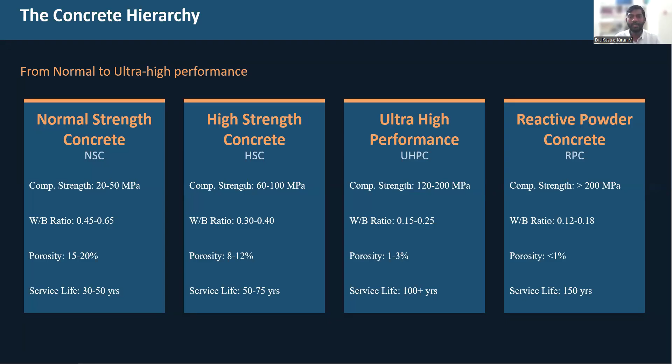And as we proceed with each concrete type based on its strength, obviously we can increase the service life of the structure as well. As you can see, for normal strength concrete, the service life can be expected up to 30 to 50 years roughly. And when we go for high strength concrete, ultra high performance and reactive powder concrete, the service life of the structure can be increased at a larger scale, which is economical and at the same time a good sign for concrete technologists or concrete researchers.

But we have some limitations with conventional concrete. Typically, conventional concrete lacks in tensile strength, giving a very low amount, approximately 2 to 5 megapascals. That's the maximum that we can attain in the low tensile strength of conventional concrete. And that also comes with poor durability because of a larger amount of pores compared to other types of concrete.

So this is also susceptible to harsh durability conditions. Let's say when I expose conventional concrete to acids or sulfates, there is a high chance deterioration might happen within the first 14 to 28 days or within the first 56 days itself. So that's again one of the problems with conventional concrete, and the durability problems lead to higher maintenance costs. So that is also one of the disadvantages.

And coming to the carbon footprint, especially the life cycle assessment or life cycle impact, conventional concrete is also prone to consume too much material, and that leads to a higher release of carbon dioxide, so the carbon footprint will increase. That's again one of the disadvantages.

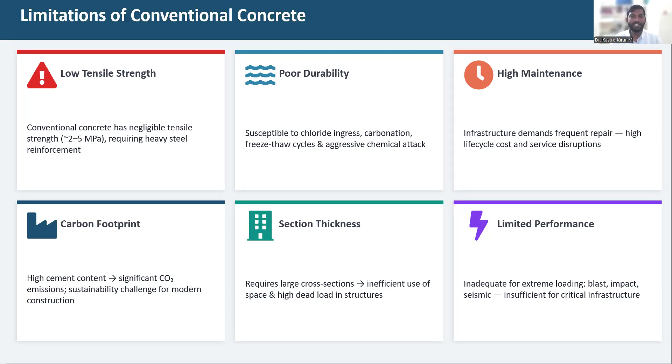And with conventional concrete, the section thickness we attain is of a larger scale. But in real time, when we go for large scale construction, especially girders or bridge decks, we need slender sections or very thin elements, providing equal or better strength with better durability. So considering all these limitations of conventional concrete, we got a better one, which is ultra high performance concrete.

In simple terms, we can define ultra high performance concrete as something which will give strength between 150 to 250 megapascals. Again, this is not a standard value. That's a typical value reported across the literature which I have studied. And ultra high performance concrete will yield up to 15 to 30 megapascals of flexural strength, which is a very good sign for utilizing it in bridge decks, girders or large scale construction.

And we can also minimize the crack width, which will be less than 0.2 mm, which is better compared to any other type of concrete available at the moment in the industry. It also has low permeability because of its dense packing and its material composition, since very fine materials are used in the preparation of ultra high performance concrete. That leads to lower permeability.

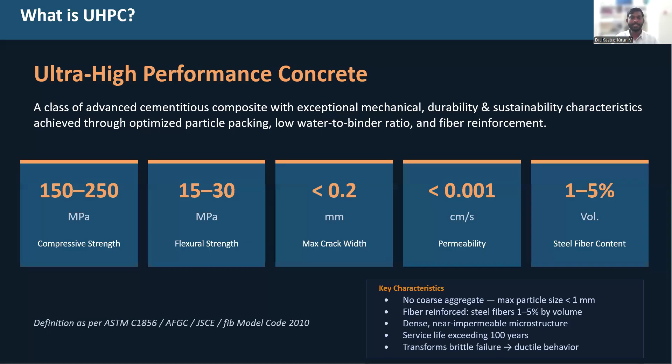Now the question here is, why do we need UHPC? The first thing is infrastructure demands. Let's say I'm constructing lengthy structures or tall structures, or structures which are more susceptible to corrosion or any kind of durability-related vulnerabilities. Because of this infrastructural demand, we need to go with ultra high performance concrete.

And when we need slender sections, let's say thinner elements from a structural perspective, not just a material perspective, then again we need an alternative material, which is UHPC. And UHPC also provides better durability: provided the right combination of materials is used, we can attain exceptional durability characteristics, which can lead to 100 plus years of lifetime of the structure.

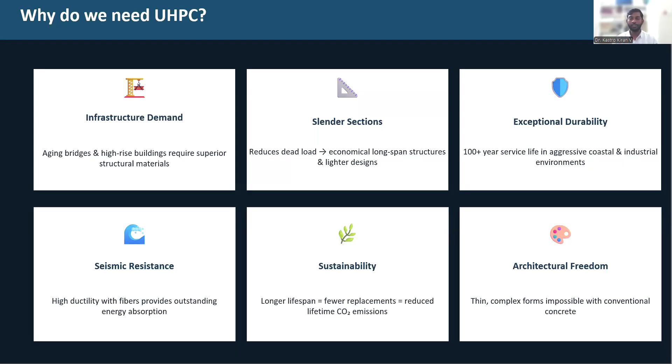And when UHPC is combined with certain kinds of seismic design, that can also increase the seismic performance of the structures as well, which is nowadays preferred in the construction of bridges or bridge decks, especially focusing on seismic performance alongside the priority given to the sustainability aspect as well. So we can use less material, which will produce greater strength or greater durability in real-time scenarios. So that's the need for UHPC.

And coming to the real-world applications of UHPC, mostly UHPC is preferred for bridge decks, bridge joints, or even protective structures, architectural facades, and marine structures. Particularly, I'm working with bridge decks, joints, and marine structures. And for retrofitting also, it will be very easy in the long run. And this is particularly preferred in seismic zones where we can expect earthquakes of magnitude greater than or equal to 4.5 to 5.

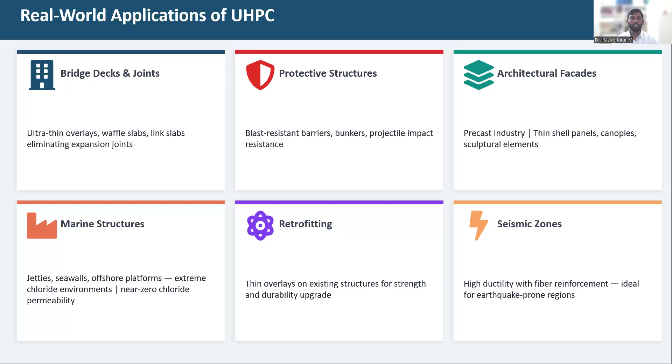So there are proven case studies which show that when we use UHPC for large-scale constructions, especially bridge decks or marine structures, they have resisted seismic loads, which is again a good sign for concrete technologists as well.

And coming to the UHPC design standards on materials, across the globe there are multiple design standards available, and these are some of the popular design standards for UHPC which you can refer to when you are working on UHPC mix design or UHPC testing. So there are different protocols. You can use any one of these protocols or a combination of them to see how things are going to work when you are testing in laboratory conditions, or even when you take it to large-scale field testing.

And we preferably work with the FIB model code, which is a standard one. Again, that comes with fiber reinforcement. It's not just the UHPC thing; it is ultra high performance fiber reinforced concrete provisions. Especially in UHPC, we'll be using fibers, especially steel fibers. So in that case, the FIB model code and ASTM code are preferred.

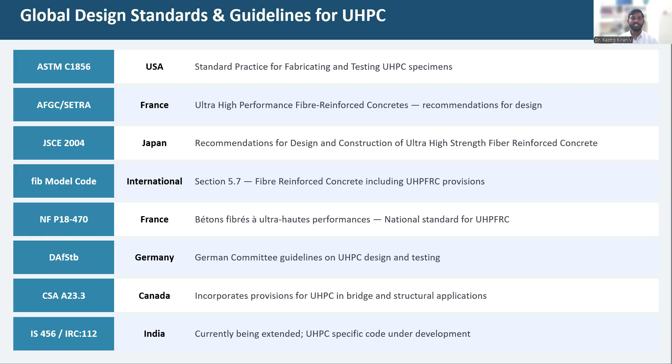And coming to the materials of UHPC, UHPC doesn't contain any coarse aggregate, which is one of the most important things to keep in mind. Because of the finer materials we use in UHPC, it leads to higher strength, higher durability, and dense packing of the materials. Alongside that, it is also important to focus on durability, which most researchers miss out, considering only strength as the primary perspective. Yes, strength is good, but it is also important to check the structural performance and durability performance. And practically, we need to check whether life cycle assessment, life cycle impact, and carbon footprint are also considered in the design.

So the materials include cement, which is typically ordinary Portland cement. We cannot go with PPC, which is Portland pozzolana cement, because PPC has a certain amount of fly ash combined with it. And when you have fly ash in your cement or concrete mix, that doesn't lead to early strength; it leads to later-age strength, at the end of 56 days. That's how we typically get it.

And silica fume is typically used between 15 to 25% by weight of the cement. Again, we can reduce this silica fume content. In the present work I'm currently doing, we are not even using silica fume, but still we are able to attain 130, 140 megapascals of strength. However, we are using microfine silica as an alternative to silica fume, but that is also at a very minimal level.

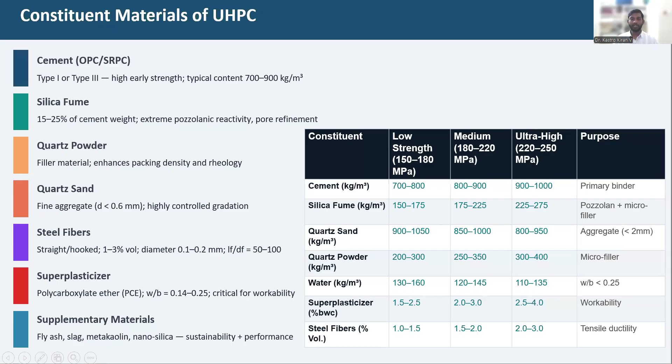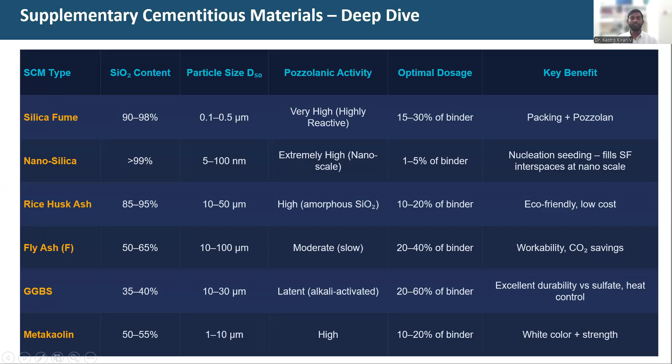And coming to supplementary cementitious materials such as silica fume, nanosilica, metakaolin, rice husk ash, and all these things. These are the typical dosages that we generally prefer or have observed over a period of 6-7 months of deep understanding of the existing literature on UHPC. This is what I have consistently noticed in the literature with respect to how much SCMs, that is supplementary cementitious materials, can be utilized in UHPC so that we get better strength and better pozzolanic activity, considering the SiO2 content and the particle size, especially the D50 size in micrometers.

And coming to steel fibers, we have different steel fibers currently available in the market, particularly straight fibers, which we also call smooth fibers, hooked end fibers, twisted and helical fibers, and PVA and PE fibers, that is polyvinyl alcohol or polyethylene synthetic fibers. Among all of these, it is proven that either straight fibers or hooked end fibers yield better strength. Again, hybrid fiber combinations also give much better tensile capacity and a better structural perspective.

But in real-time scenarios, we mostly try not to use helical steel fibers or PVA or PE fibers, primarily because of the cost aspect, and also the production is very low compared to straight fibers and hooked end fibers. So the most common type of fibers we generally get in the market is hooked end fibers. But there are some suppliers which provide straight fibers also, and when we use a combination of fibers, that leads to better strength as well.

And particularly when we use a combination of steel fibers, it is very important to focus on the volumetric percentage of each type of fiber. So when we use combinations, obviously the focal point has to be on the combination. Let's say if I use 1% of steel fiber and 1.5% of glass fiber, how will the material behave.

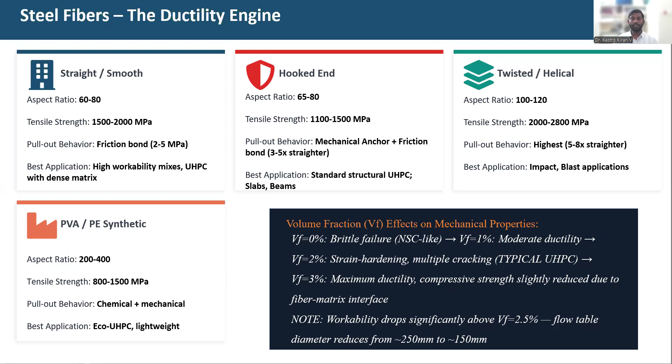So when we change the volume of the fibers from 0% to anything greater than or equal to 3%, some properties will get increased, which is very much valuable. And there are some properties which will show a negative effect. That's again not a good sign to produce a durable and high performance UHPC concrete. So that's one more thing we need to consider as we are working on UHPC.

Packing density is one of the most important things in the mix design of UHPC. Without doing a proper packing density analysis or test, it is impossible to attain maximum packing. And if you are not able to achieve maximum packing, that leads to reduction of strength and a higher amount of pores, which will also cause durability issues.

There are different packing density models available or reported in existing literature. The very popular model which we have is the Andreasen and Andersen model, which is the most widely used model across the mix design of UHPC. You can adopt this particular model to ensure the packing density analysis, or to see how much packing density is attained when we use a combination of all the materials.

Most people check the packing density with only the cement, silica fume, and any other materials used as supplementary cementitious combinations. But in general, whenever we are testing packing density of UHPC, utmost preference has to be given to all the materials used in the preparation of UHPC. So for all the materials combined together, it is important to measure the packing density analysis.

We have microstructural studies which can be done using packing density, and then we can write the Python code or the MATLAB code if you are good at it. So you can run an analysis to get to know how your packing density will be coming with respect to the Andreasen and Andersen model or any of the models available.

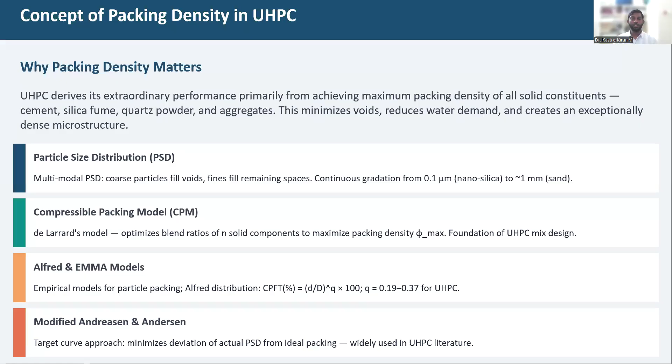Until or unless your curves are close to the existing models, what it yields is it might yield a better strength, but it might not yield better packing density. And when we don't get better packing density, in the long run the structure will get affected, and durability can be one of the most concerning factors also.

But durability can also be considered a key role in the design of UHPC, because just because we are getting higher strength, let's say 150, 200 megapascals, we cannot exactly tell that it might yield better durability conditions. The permeability, porosity, sorptivity conditions, chloride permeability, acid resistance, or carbonation tests—any of these things also has to be tested.

Because when we construct structures with UHPC materials, we expect the structure to last for at least 150 plus years of age. So when we are constructing a structure which will stand still for 150 plus years, utmost preference has to be given for durability as well, alongside the strength.

That's why packing density is critical in the design of UHPC.

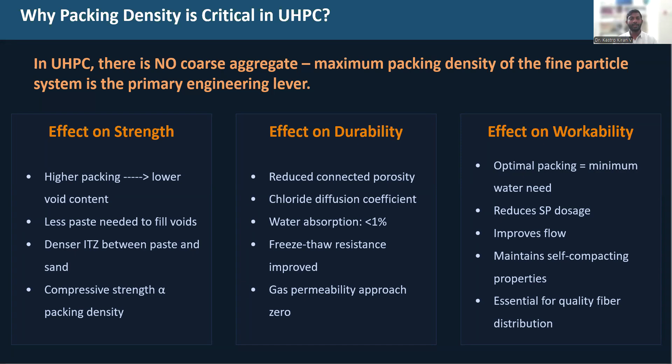The typical mix design methodology that we generally follow in the preparation of UHPC is: first, we define the targets. That's the primary thing we focus on. Once we define the targets, we select the materials, whatever materials we need. Then based on the materials used, we need to do the particle size distribution or particle packing density analysis, that is PSD or PPD analysis, particularly using microstructural studies like XRF or XRD analysis of all the material combinations. Once we get this particle packing density analysis, then it is recommended to do the mix design.

When finalizing the superplasticizer dosage, it is essential to attain a minimum mini slump flow of greater than or equal to 200 mm. If you get a flow of 220-230 mm, that's very good, but don't go beyond 250 mm, because that leads to segregation or bleeding of the materials. Keep the flow less than or equal to 230, that would be more than sufficient, but don't go below 200 mm. That's a bad sign for flowable nature of UHPC, where you cannot attain easy flow, especially if you are focusing on self-compacting UHPC.

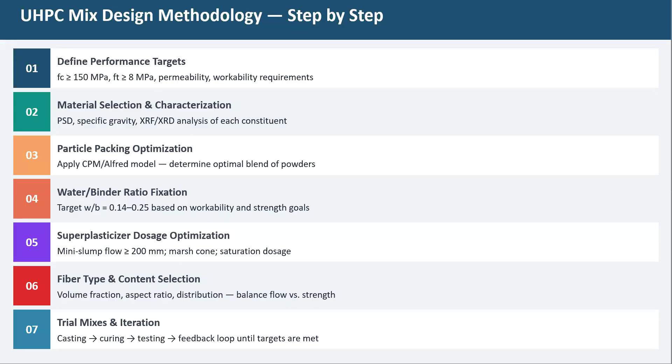It is imperative to do multiple trial mixes, because it's not that in one trial we get the entire properties or desired characteristics of UHPC. It's an iteration of multiple materials, as with any concrete preparation, so it is imperative to do multiple combinations of trial and error, so we can finalize the final mix design, followed by taking it to large scale or field level testing. That's with respect to the mix design methodology.

Coming to mechanical properties and test methods, we'll focus on compressive strength, tested on 100 mm cubes. That's the standard one. Anything with 100 mm cubes is more than sufficient, but 150 mm cubes are also fine. Typically in laboratory testing for UHPC, we go with 100 mm cubes, and that's sufficient along with 100 by 200 mm cylinders, as per IS code guidelines as well as ASTM standards.

There are different mechanical properties to focus on. We generally focus on compressive strength, tensile strength, and flexural strength, which is good at a primary level. But at a large scale level, it is very much essential to find out the elastic modulus, fracture energy, creep and shrinkage, which are basically from a structural point of view. These are the primary tests to consider. The first three - compressive, tensile, and flexural strength - are the very basic strengths where you find minimal mechanical properties. But from a structural perspective, these six are the very basic minimal structural characteristics.

Alongside these 6 mechanical properties, there are also numerous other properties available - let's say cyclic loading or any kind of fracture energy tests, and these can be customized as per the research direction that you are working on.

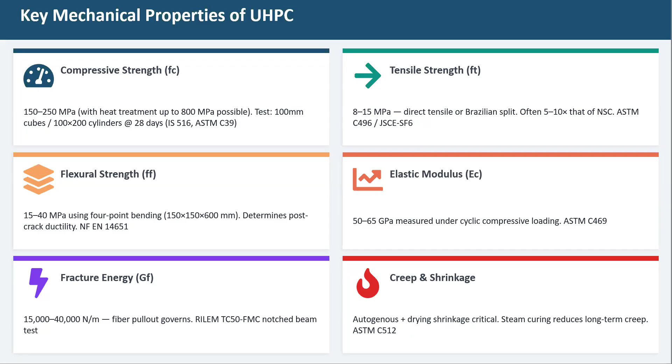Coming to testing standards, we have different standards across the globe. Mostly you can prefer either ASTM standards, which is a standard one, or Indian standard codes, which give almost equal range of testing standards. When testing with any standard protocol, say ASTM standards, make sure you test at the average loading rate specified in the code conditions. Because if you test at a loading rate that's just whatever is convenient or available, that may not yield better strength or better properties.

So make sure loading rate is also considered as the primary aspect when you are doing any kind of mechanical property testing.

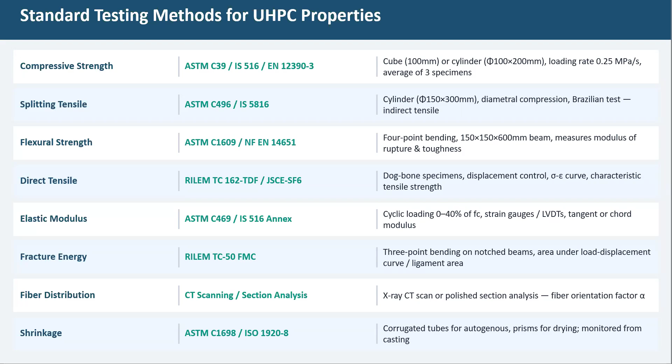Coming to the durability studies, which is often missed out or overlooked in most studies, particularly in UHPC concrete: chloride penetration, carbonation resistance, freeze thaw, alkali silica reaction, alkali aggregate reaction. Despite UHPC not having alkali aggregate reaction since we use fine aggregate, quartz sand, quartz powder, it is still essential to find out even alkali silica reaction and alkali aggregate reaction.

Despite that, it is also imperative to focus on fire and thermal resistance, for which very limited literature is available. Focusing on fire and thermal resistance gives a broader perspective, especially if you are testing UHPC at elevated temperatures, let's say 200, 400, 600, even up to 1000, 1500 degrees centigrade. That gives a better perspective towards understanding UHPC under exposure to elevated temperatures.

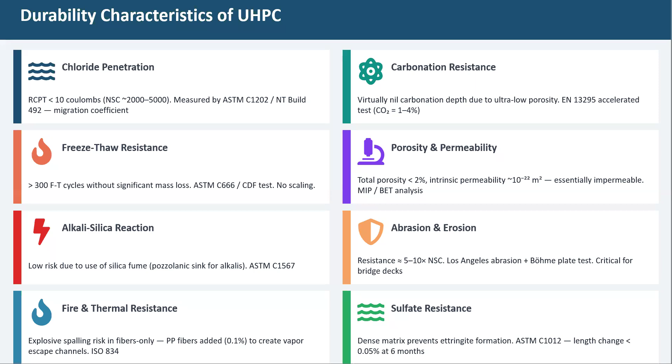There are different curing regimes that can be followed in UHPC. Standard water curing is generally what is followed, but when we use steam curing, that's where we attain better strength. In the current research I'm working on, we are also focusing on steam curing, where we are looking at strength drastically increasing by up to 30 to 40 megapascals. But again, that may not be feasible in real-time scenarios, particularly with steam curing.

But when you are going with precast structural elements, especially bridge decks or girders, these are all precast elements. So when we go with precast elements, we have the possibility in laboratory, factory, or industrial conditions to go with steam curing. So if possible, try to do steam curing also, so that you get to know how things validate between the different types of curing compared to steam curing.

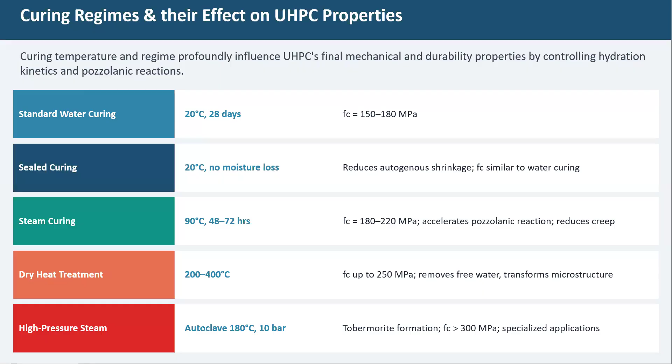Coming to machine learning models, which is one of the most useful things to avoid large scale testing. But when we do machine learning, people often get confused, asking: do we need to generate this much amount of data to perform machine learning? It is quite obvious that when we do any machine learning or AI-based analysis, we need a large amount of data set. This is not obvious for people from civil engineering or research-based civil engineering backgrounds.

We know it is not so possible to generate a large set of data, which is a proven fact, because when we do testing in laboratory conditions, suppose for compressive strength testing or other mechanical properties, we generally test at 7 days, 14 days, and 28 days. That's the typical pattern or timeline we follow. So at each aging period, say 7 days, we mostly test 6 specimens, take the average of those 6 specimens, find the standard deviation, and report the average strength combined with standard deviation. So keeping that very minimal amount of data set into consideration...

It is not so possible to work with or implement machine learning models when we have a limited data set. So people working in UHPC, or any kind of concrete, it doesn't necessarily need to be UHPC—I'm generalizing this with any type of concrete combined with machine learning. When you want to go with machine learning, try to generate the data, especially at laboratory conditions, because only then will you avoid the problems of overfitting or underfitting. These are two major issues in machine learning analysis: overfitting and underfitting. That's again a problem when we run machine learning algorithms. So try to generate as much data as possible, or at least get databases—there are different databases available as open source models in browsers.

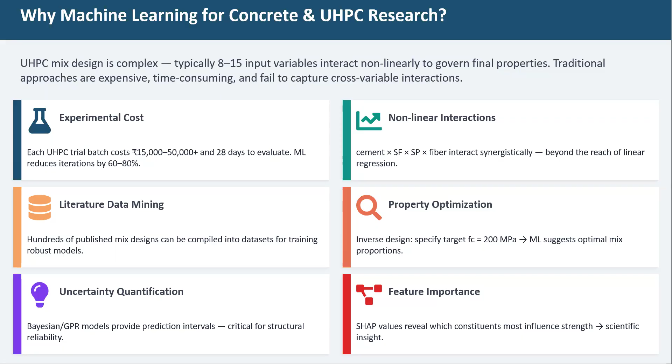So these are the main conditions why machine learning can be used in concrete and UHPC research. The scope of machine learning will particularly focus on the mix design aspect, where very few researchers have focused on machine learning combined with mix design.

Let's say if I give a target strength that I want to achieve, and these are the materials that I want to use - there are very limited models which give complete material properties, material characterization, or combination of materials. So maybe you can work on that area, which is also something I'm currently working on by collecting data.

Compressive strength or mechanical properties prediction is quite common in any ML-based approach, not just in UHPC. If you take any concrete, 90 to 95% of studies will mostly focus on prediction of strength parameters - it can be compressive strength, split tensile, or flexural strength. That is also fine, but most focus is there.

Coming to other standards such as life cycle analysis or cost analysis, you can also incorporate machine learning to perform these. We have different software available to perform LCA or any kind of life cycle assessment test, but alongside that software analysis, we can incorporate machine learning to get environmental carbon footprints, embodied energy, total cost of ownership, production cost, and carbon dioxide emissions. All these things can also be utilized with machine learning.

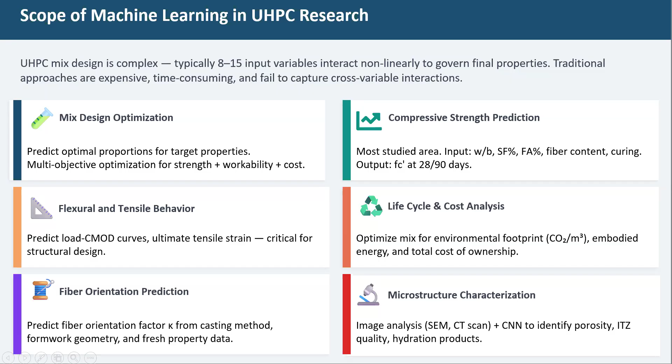This is where current research is lacking, especially in UHPC research, and in normal concrete too. Most researchers have particularly focused on strength prediction or mechanical properties behavior prediction. There are very few studies which focused on mix design, life cycle, and microstructural characterization with the implementation of ML. So that's where you can also look into it.

With the selective studies and limited predictions or limited data that is available, coming to the key research areas, particularly in ML UHPC, compressive strength prediction is the most commonly studied area. As I was telling some time back, it's a commonly studied area which you don't need to focus on at a large scale, or treat as a key machine learning approach.

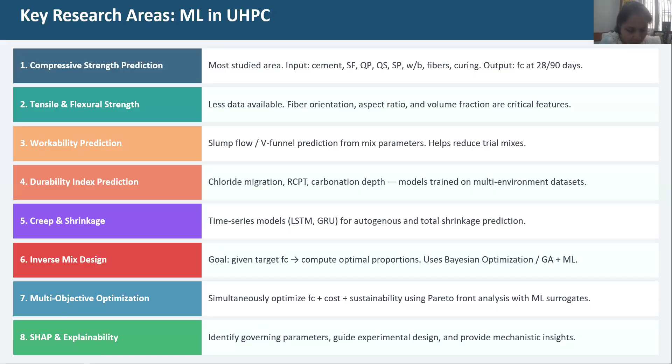Creep and shrinkage obviously has a very large scale scope in real time scenarios, so that can be considered as one of the key research areas in your designs. It need not be UHPC specifically, but I'm just focusing on UHPC. Whatever I'm giving here with respect to ML, you can incorporate with any of your concrete mixes or concrete types you are currently working on or planning to work on. So these are the key research areas, generalized to concrete and narrowed down to UHPC.

Now, how can we generate the data? This is one of the common questions we generally get, because with ML we need large amounts of data. So it's very important to find how to generate and collect the data. When you want to collect data, we need to do multiple literature searches or collect literature datasets.

From the collection of literature datasets, we can do the prediction of compressive strength either at 28 days or even at early days, let's say 7, 14, or 28 days, or in later days such as 56 days, particularly if you are using fly ash as one of the supplementary cementitious materials. So this is one scope with respect to compressive strength prediction.

The second scope is durability prediction, where you can use the RCPT test, that is the Rapid Chloride Permeability Test. But RCPT has its own limitations, so it's better to go with the Rapid Chloride Migration Test, which gives better results. Instead of just measuring the current passing through, you can also measure how much chloride is migrating or passing through the sample from one end to the other. That can also be considered as one of the scopes.

There are different methods available to collect data, particularly with respect to ML studies. First, you can perform laboratory tests and collect the data, that's a very basic thing. Or if you lack data, you can collect data from existing literature or existing databases, which you can also compare with your existing data.

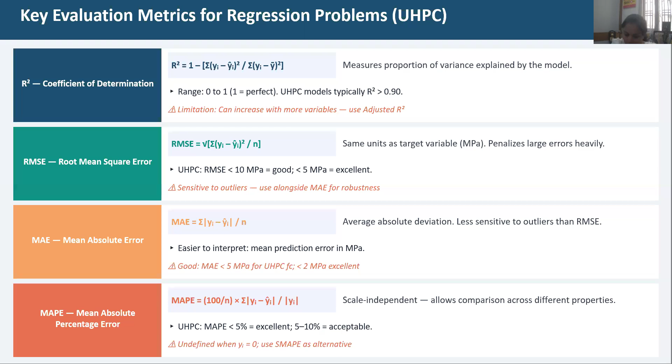Even 0.95 or anything greater than 0.95 of R square value is not typically considered, because you might have overseen the data, or you might have overfitting or underfitting, which is again not a standard way of reporting the data. So keep that in mind when you are going with evaluation metrics also. And coming to the model strategies, there are different models and different strategies that are available. So this is one of the most famous, that is the K-fold validation model. And apart from that, there are different models that are there.

I know I'm talking too much about machine learning, but this presentation overview is all about giving a fundamental perspective about what are the different models that are there. So once you know all these models, it will be easy for you to select or to pick a right model for the right testing standard. So that's the whole point of my presentation here.

And the common pitfall that we generally overlook in the data is data leakage, which is one of the most common pitfalls. So we'll collect a huge amount of data, but when we test the data, we'll get more leakages. Let's say some data will have some material, some data will have some other materials. So there will be a gap. Because of that data leakage, underfitting, overfitting, or the performance of the model will get affected. So that's one common pitfall that we generally see with respect to UHPC or any type of ML-based techniques.

And the smaller database, that's again one more thing. When the database size is less than 100, that gives overfitting, which will not give better results. So when you have a data set less than 100, prefer to go with either GPR, that is Gaussian process regressor, or SVR, support vector regression, or any regularized models.